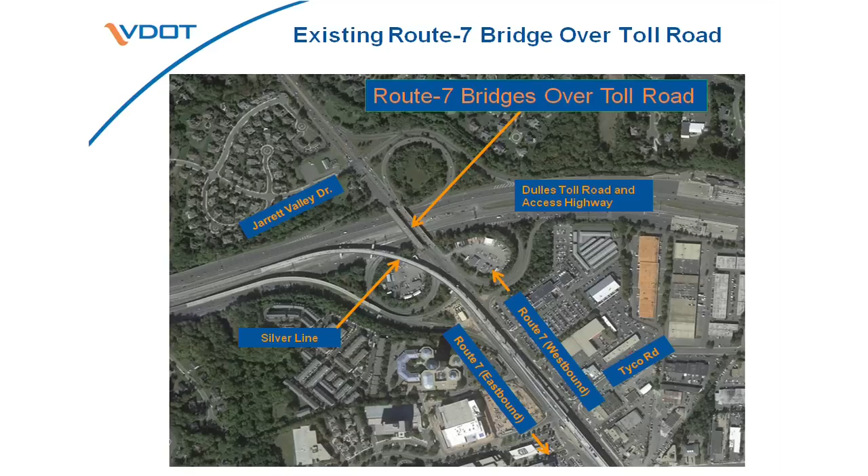Shared use paths will be provided to connect the existing facilities to the new Spring Hill Metro Station. This project will also prohibit U-turns from westbound Route 7 to eastbound Route 7 at the intersection with Jarrett Valley Drive. We have developed 3 shared use path alternatives that will be discussed later in the presentation.

Existing Route 7 is a 4-lane divided facility. Along with the reconstruction and widening of the Route 7 bridges over the Dulles Airport Toll Road and Airport Access Highway, Route 7 will be widened to a 6-lane facility between Jarrett Valley Drive and the improvements to Route 7 constructed by the Dulles Rail Silver Line project.

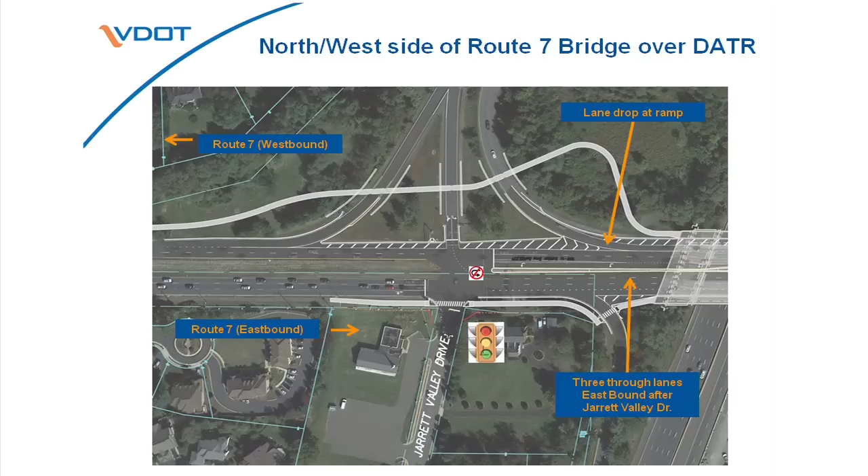This project will transition back to the existing conditions west of Jarrett Valley Drive. This will be accomplished by dropping a westbound lane at the ramp from westbound Route 7 to westbound Dulles Toll Road and Airport Access Highway. The 3 through lanes eastbound will begin after Jarrett Valley Drive.

Across the Route 7 bridge in both the eastbound and westbound directions, auxiliary lanes will be provided for the interchange ramps. Route 7 on the southeast side of the Dulles Toll Road and Airport Access Highway will connect to the Route 7 improvements constructed by the Dulles Rail Silver Line project. This project constructed a 6-lane facility from just east of the location to where the future Silver Line crosses over eastbound Route 7.

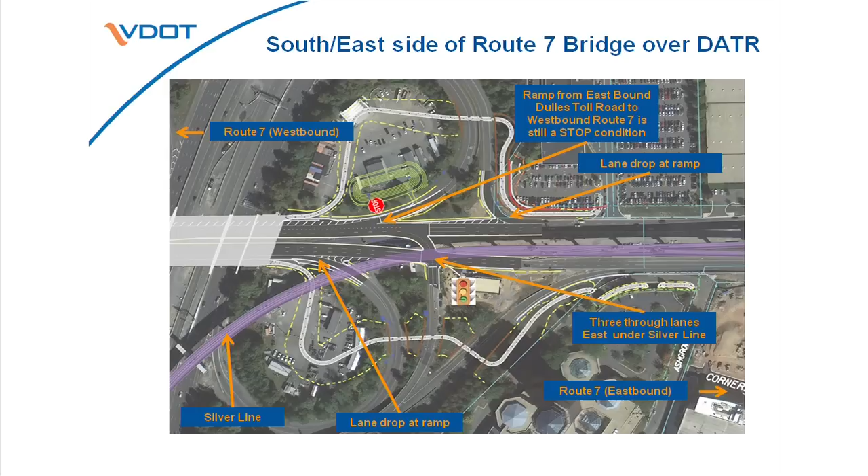The existing lane drop at the ramp from westbound Route 7 to eastbound Dulles Toll Road will continue. The ramp from eastbound Dulles Toll Road and Airport Access Highway to westbound Route 7 will continue to be a stop condition at the end of the ramp before merging onto Route 7.

This project segment is actually sandwiched between 2 projects that are at different phases of design and construction. Both will widen or have widened Route 7 to 6 lanes and provide shared use paths or sidewalk. On the western end, the design of the project between Reston Avenue and Jarrett Valley Drive progressed through a public information meeting in November 2013, but does not have funding to advance the design to construction. On the eastern end, the Dulles Rail Silver Line project is currently under construction and should be completed in 2014.

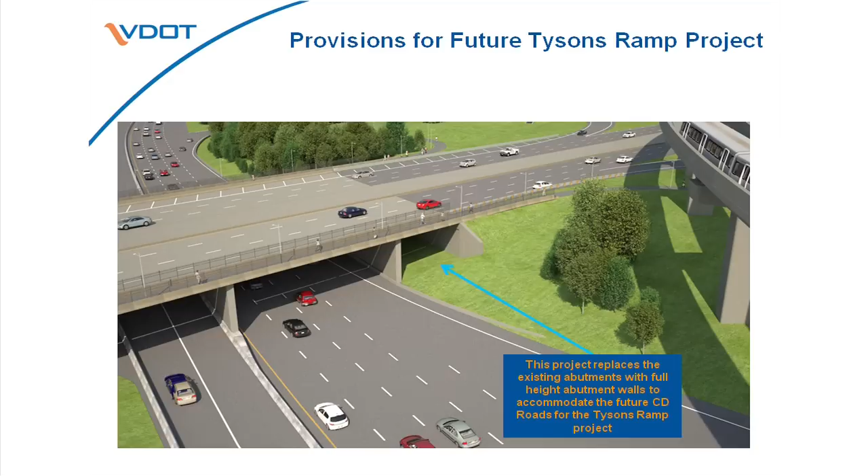Fairfax County is currently planning improved access to Tysons from the Dulles Toll Road and Airport Access Highway. The Tysons Ramp project proposes collector-distributor lanes on each side of the Dulles Toll Road and Airport Access Highway. To accommodate the CD lanes for the future Fairfax County Tysons Ramp project, this project will replace the existing abutments with full-height abutments. The 2 existing Route 7 bridges will be widened for Route 7 to be a 6-lane facility with an additional auxiliary lane on each side for the interchange ramps.

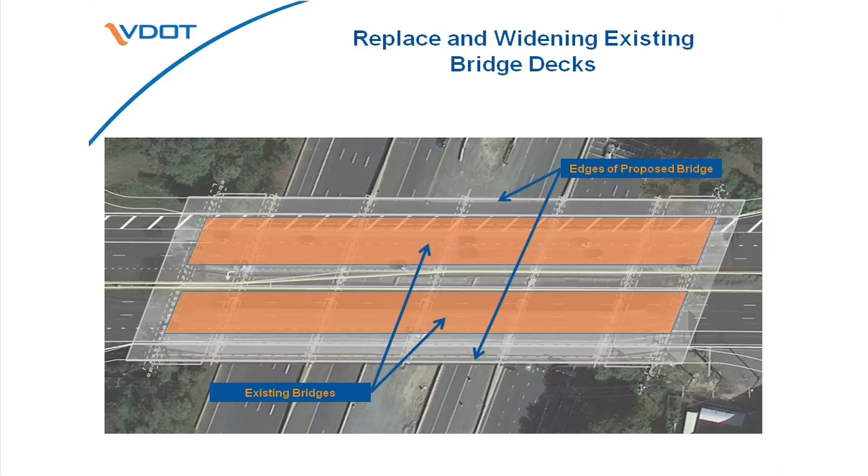The bridge will be wide enough to provide 14-foot shared use paths on both sides, or a wider single shared use path in the median of the bridge. The next few slides go over the 3 shared use path alternatives that are being considered for this project. The 3 alternatives are at grade, underpass, and median shared use paths.

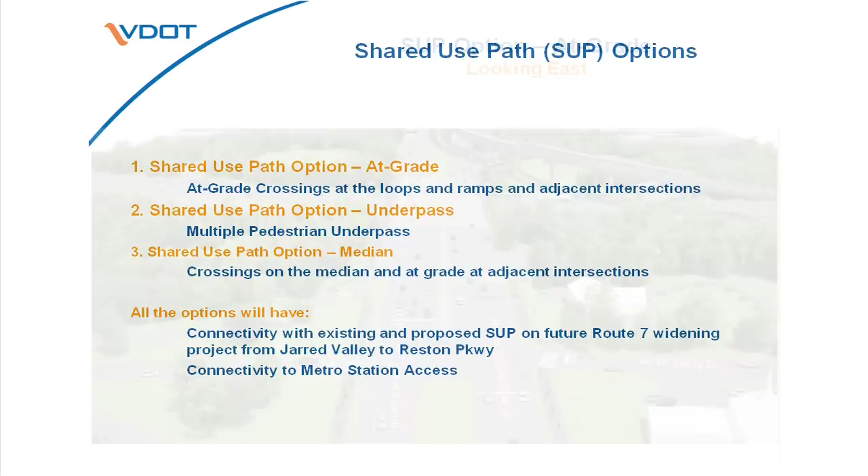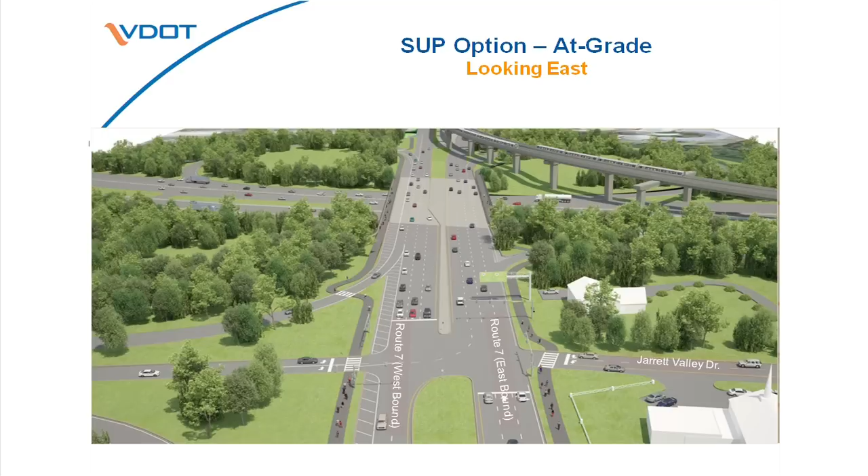The shared use path alternative selected for this project will provide connectivity from existing facilities on the western end of the project to the Spring Hill Silver Line Metro Station. The interchange between Route 7 and the Dulles Toll Road and Airport Access Highway has 9 ramps that provide access to and from Route 7. The shared use paths are located on the outside of Route 7 and cross the ramps at grade. Since the crossings are at grade with vehicles, this option is the least safe for pedestrians and bicyclists.

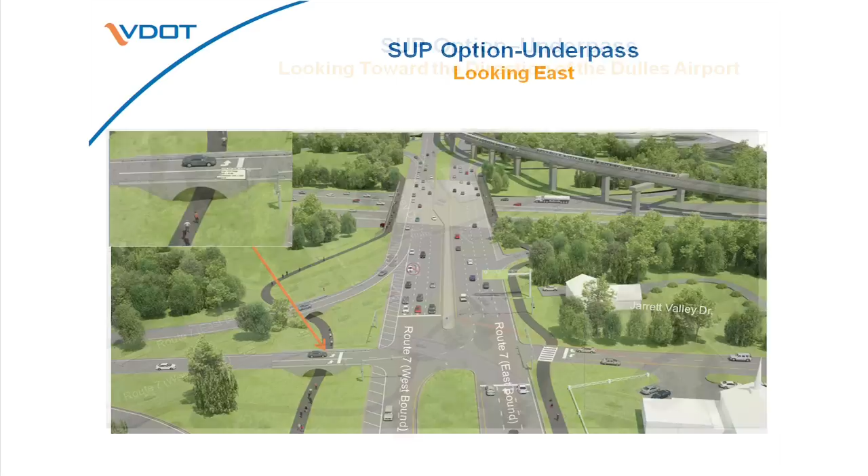The second shared use path option is the underpass option. The shared use path goes under 8 of the 9 ramps by providing arched structures on the ramps. The one ramp that an underpass cannot be provided is the ramp from eastbound Route 7 to westbound Dulles Toll Road and Airport Access Highway. This is the safest shared use path alternative for pedestrians and bicyclists. You see the shared use path in this option going under 8 of the 9 ramps. Pedestrians and bicyclists can proceed without stopping or yielding to traffic at 8 of the 9 ramps.

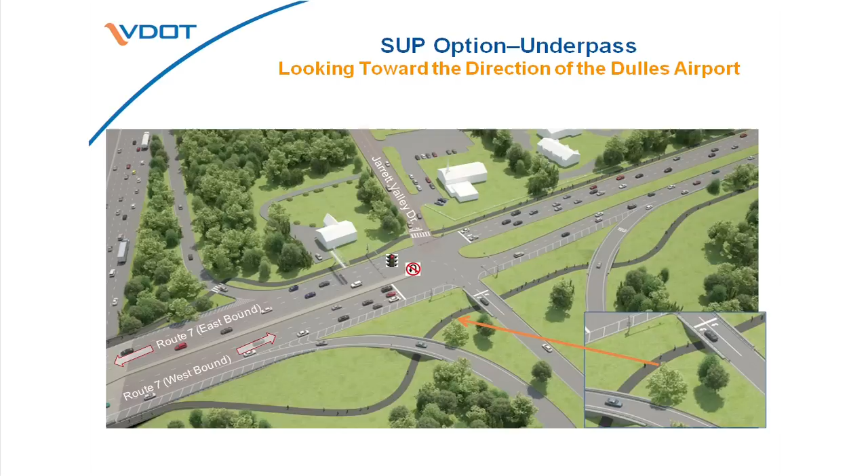Here is a close-up of one of the shared use path underpasses. The shared use path will be used by both pedestrians and bicyclists. A stone facing would be placed on the underpass structure.

The third option is a median shared use path alternative. The shared use path is transitioned to the median at the signalized intersection at Route 7 and Jarrett Valley Drive. The median shared use path continues across the bridge and crosses the median at grade at the signal between Route 7 and the ramp from the Dulles Airport Toll Road and Airport Access Highway. The median shared use path is transitioned back to the outsides of Route 7 at the signalized intersection of Route 7 and Tyco Road.

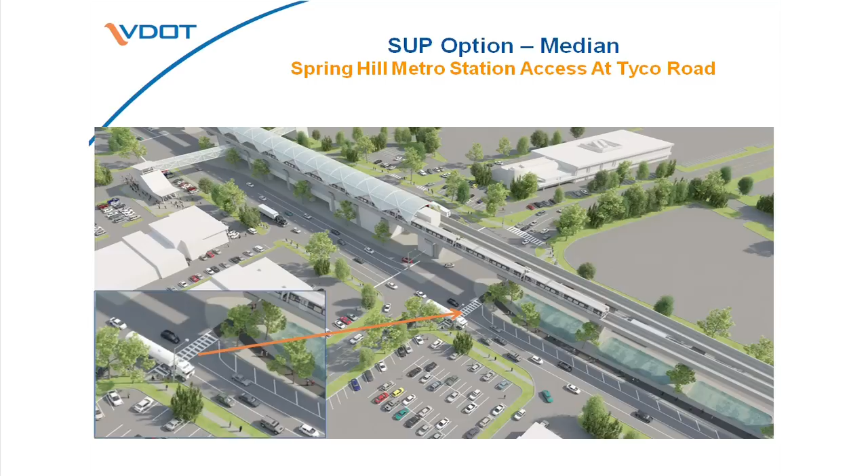This shared use path option only provides one shared use path for the length of the project, and the noise will be louder since you have traffic on both sides of the shared use path. It is also the least safe option for motorists since pedestrians and bicyclists will be in an unfamiliar location that may be a distraction to them. VDOT prefers the underpass shared use path option because this option is the safest option for bicyclists and pedestrians. However, the final decision has not been made.

Let's now review the anticipated schedule for this project and the estimated cost. The comments from this public hearing should be turned into VDOT by March 3, 2014. VDOT is currently working with Fairfax County to fund this project for construction and deliver it as a design-build project. The right-of-way acquisition and construction should begin in fall of 2014. The approximate total cost of this project, based on the underpass, is currently estimated to be $34.4 million.

This concludes the overview of the Route 7 project to reconstruct and widen the bridges over the Dulles Airport Toll Road and Airport Access Highway. As you enter the cafeteria, note there are different stations you can visit. There is a right-of-way station where you can get information on typical processes. While the design is not advanced enough to have any specific information on right-of-way as it relates to the project, there is VDOT staff on hand to answer general questions.

There is also an environmental station where you can get general information on anything environmental related, including noise analysis. You can visit all of the stations or just pick the ones you're interested in. Please make sure to fill out a comment sheet and send in your comments by March 3rd.